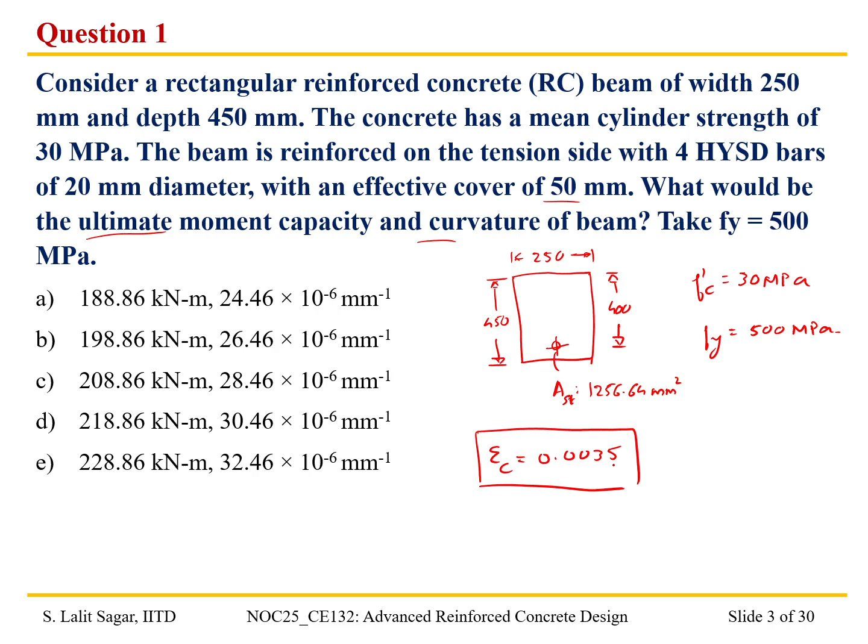I'm going to be solving this using two methods. First we are going to solve it using the regular equations, then we're going to confirm that with the Excel sheet also. We already have the cross section over here.

So we're going to take epsilon c equal to 0.0035. Then we need to assume a value of x, the depth of the neutral axis, so that the compressive force in concrete is equal to the tensile force in the reinforcing steel. But before that, in order to evaluate the compressive force we need the parameters of the stress block, and that is alpha 1 and beta 1. So how do we find out the value of alpha 1 and beta 1? First, we're going to find out the value of beta 1.

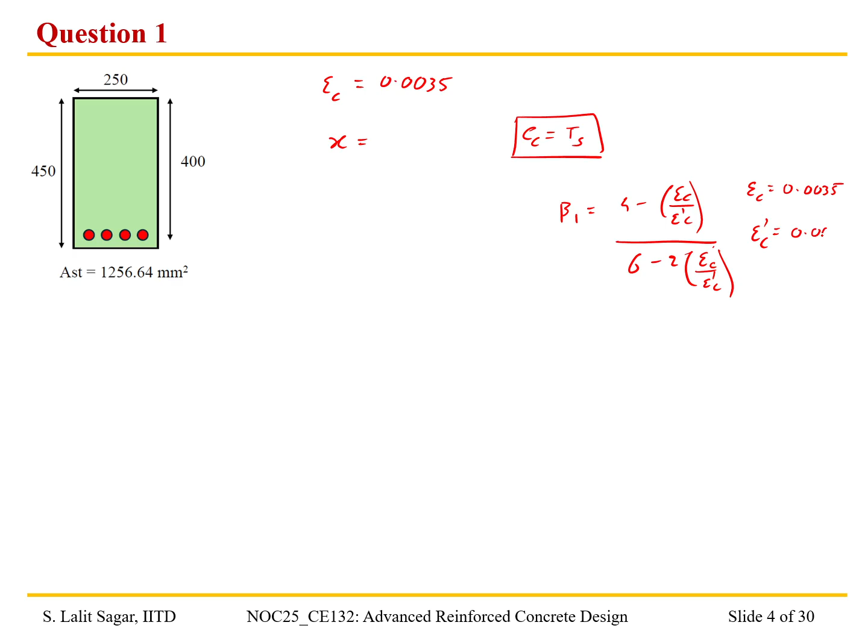Beta 1 is given by 4 minus epsilon c by epsilon prime c, divided by 6 minus 2 times epsilon c by epsilon prime c. We know that epsilon c for the current case is 0.0035. And what would be epsilon prime c? 0.002, yeah exactly, it is 0.002.

So when you solve this, we get the value of beta 1 as... 0.9? Yeah exactly, so we get the value of beta 1 as 0.9.

Let's proceed to find out the value of alpha 1. Alpha 1 is 1 over beta 1, into epsilon c by epsilon prime c minus 1/3 of epsilon c by epsilon prime c whole square. So we get the value of alpha 1 as 0.81, exactly, 0.8102.

We are solving this using the formula explicitly so that we can recap the concepts, but for higher values of strain, in order to develop the moment curvature plot, we're going to be using the Excel sheet, which I'm going to show you in a little while. So from this, let us calculate the value of the effective compressive force.

Before that, we need to assume the value of x, or the depth of the neutral axis. For this particular problem, I got that we need to consider the value of x is equal to 114.9 millimeter. So for that we have Cc equal to alpha 1, f prime c, into beta 1, into x, into b. That will give us the value of Cc.

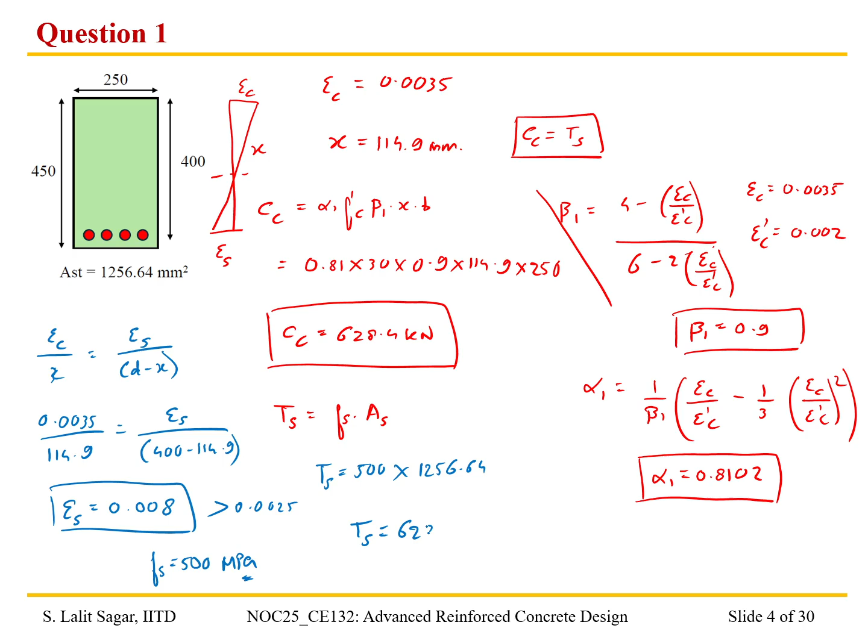1256.64, which gives us a value that has to be equal to Cc, 628.4 approximately. The value can be slightly higher or lower by 0.1 or 0.2. Once we got the equilibrium of the forces in the cross section, we'll find out the value of M.

There are various ways for finding out this value. I will utilize taking moment about the tensile reinforcement, that is Cc into d minus beta 1 into x by 2. So from that, what is the value of M that we get?

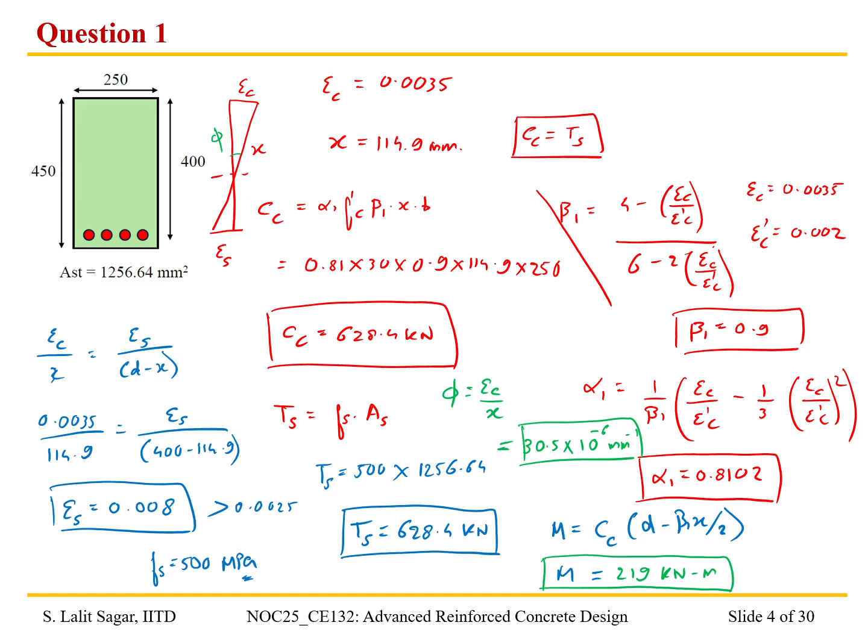So when we go back to the options, we see that option D is the correct response.

Okay, so we'll try to solve this using the Excel sheet also. I hope that my Excel sheet is visible.

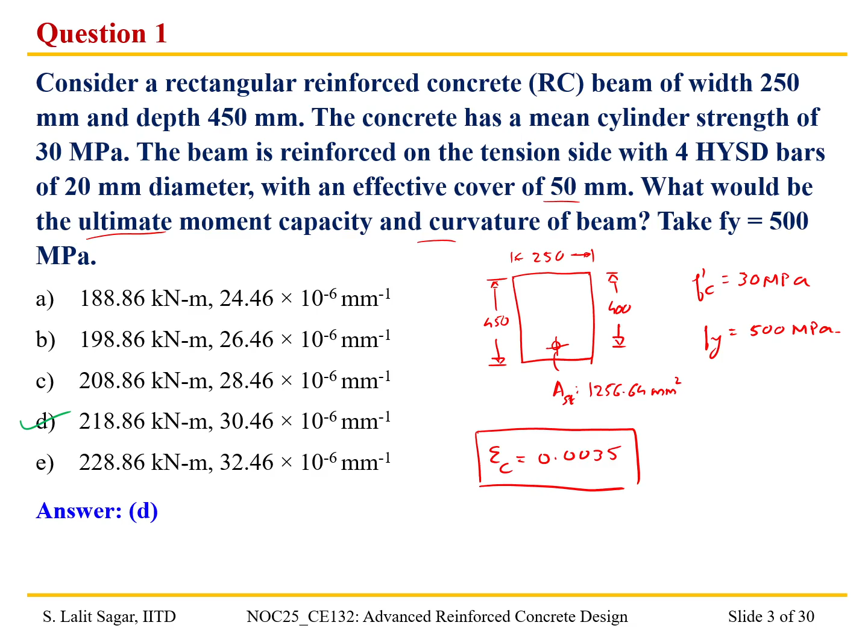I think the first problem is clear. Then we can proceed to the next problem.

So the second problem is for the beam given in question one: the existing reinforcement is replaced with 5 HYSD bars of 25 millimeter diameter. If the beam is tested under 4-point bending up to failure, which type of failure is expected?

So I request you to think for a minute and let me know how we can solve this problem. Okay, so we can solve it together.

So are you able to come up with a way of determining the solution? Kindly let me know. I'm going to draw the cross section in the meantime.

I think we have to assume X, after which we have to find the strain in reinforcement. If reinforcement strain is less than 0.0025, then we can find out if it is compression control, balanced, or tension control.

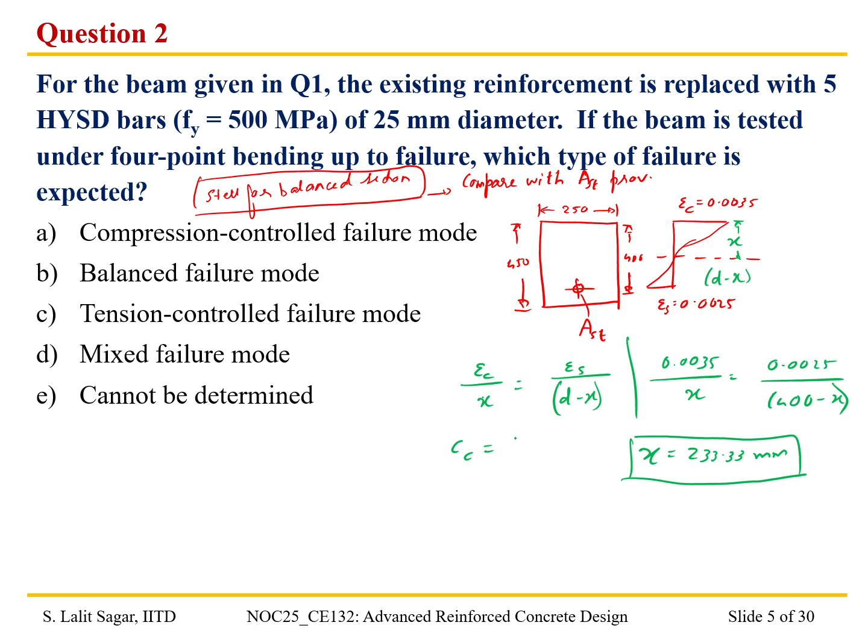And we already need to find out the area of steel. How are we going to solve that? By equating the compressive force and the tensile force, right?

And we know CC is alpha 1 F prime C beta 1 into X into B, and this is Fs into AST.

Alpha 1 and beta 1 we know from the previous problem. So we know that F prime C is equal to 30 MPa, and epsilon C is 0.0035. We know the value of alpha 1 and beta 1. So alpha 1 is 0.81 and beta 1 is 0.9.

So when we substitute all these values, we have 0.81 into 30 into 0.9 into 233.3 into 250 is equal to 500 into AST.

So solving, can you please tell me what is the AST that we are getting? 2551. Okay, thank you for the response. So AST is 2551 mm square.

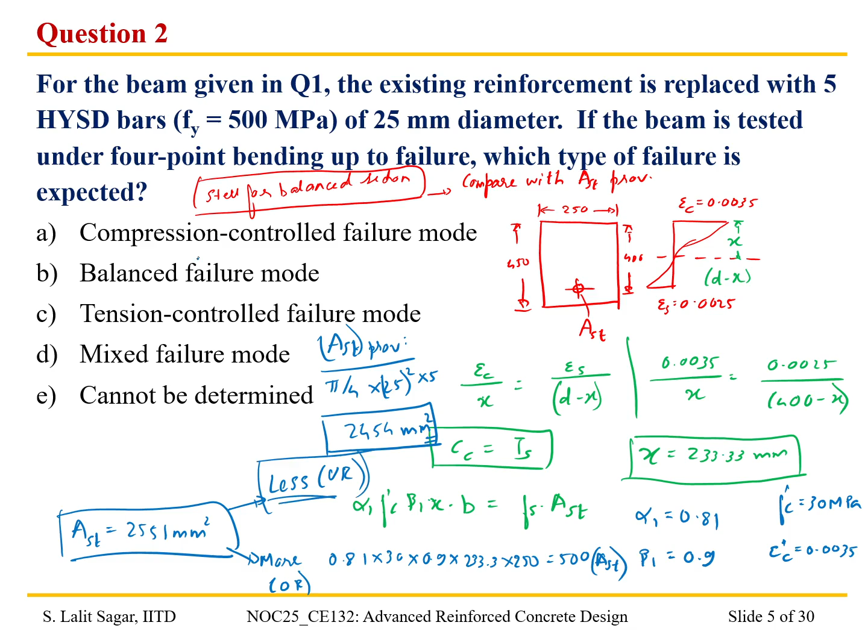So this is slightly lesser than the AST corresponding to the balanced section. So it is under reinforced and it will undergo a tension controlled failure mode. So option C is the correct response.

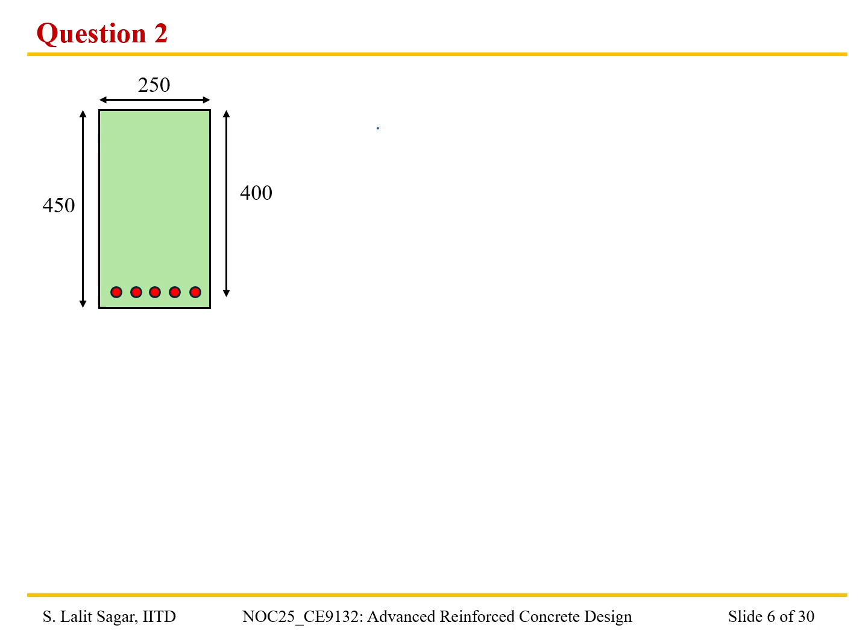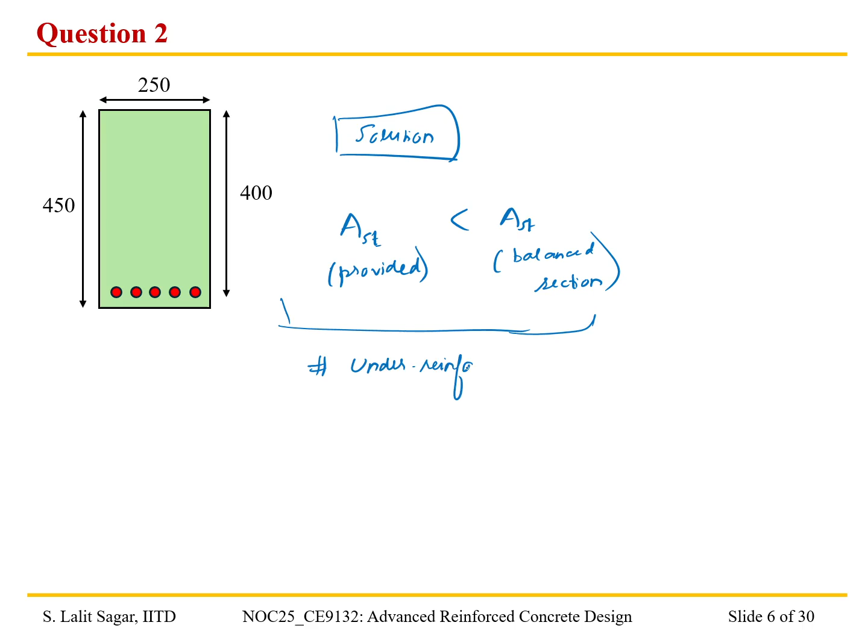So I'm going to write it down correctly over here. So the solution is: AST provided is less than the AST corresponding to the balanced section, so it is under reinforced, tension controlled, ductile failure.

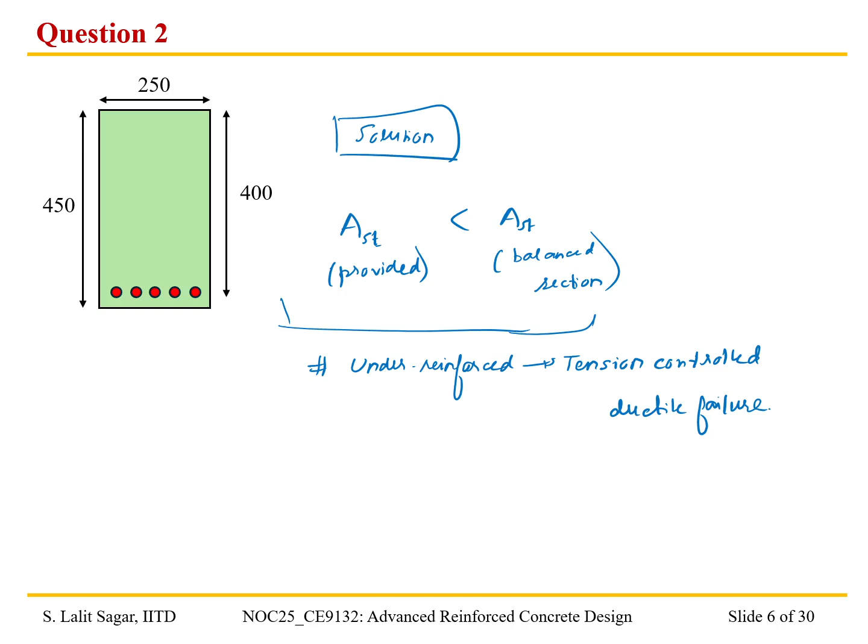Okay, so I think with that we can proceed to the next question now. So it is a straightforward conceptual question. When a beam is subjected to flexure along with axial compression, which of these equations represents the force balance equation for the cross section? Kindly let me know what would be the answer.

This is A, sir. Option A. Yes, sir. Okay, thank you for the response. Let us see what is the answer. Yeah, so exactly, option A is the correct response.

As you might have seen in the class, when we consider a beam that is subjected to uniformly distributed load and a lateral concentrated load, along with the compressive force, when you take a cross section over here and consider the force balance equation, we see that the tensile force in the rebar and the axial force on the beam act in the same direction. And in the other direction, we have the resultant compressive force from the concrete.

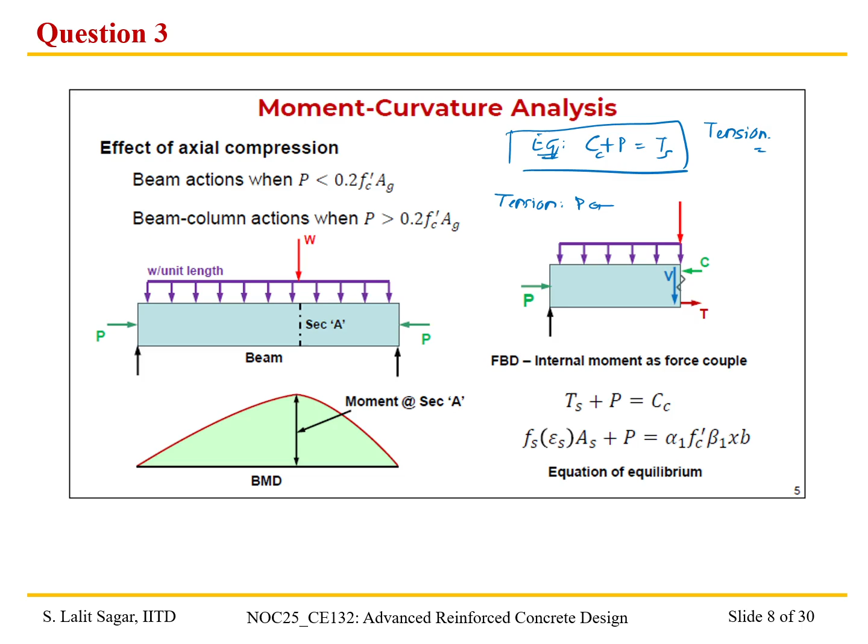So we can proceed to the next question now. This is a numerical problem that we are having. I'm going to read out the data, then we can start solving the problem. So consider a beam. Let me take the pointer.

Consider the beam of dimensions 250 by 450 millimeter overall depth. The concrete has a mean cylinder strength of 30 MPa. The beam is reinforced with 4 bars of 20 millimeter diameter on the tension side with an effective cover of 50 millimeter. If the beam is subjected to axial compressive force of 0.1 into F prime C into AG, that is 10% of the axial capacity, what is the moment of resistance and curvature of the cross section corresponding to a concrete strain of 0.0005?

Okay, so before starting the problem, I would like to ask the participants whether you have prepared an Excel sheet for this.

No, sir, I don't have Excel sheets.

So actually, Excel sheet, as I demonstrated in the class earlier, makes it very easy for you to do the iterative calculation to take the value of x and solve. So I encourage you to make your own Excel sheet, but if not, I'll be happy to share that. I can give the value of x and you can try to attempt the problem. So as mentioned earlier, the first problem we'll do using hand calculation, and later for higher values of concrete strain, we can solve using the Excel sheet.

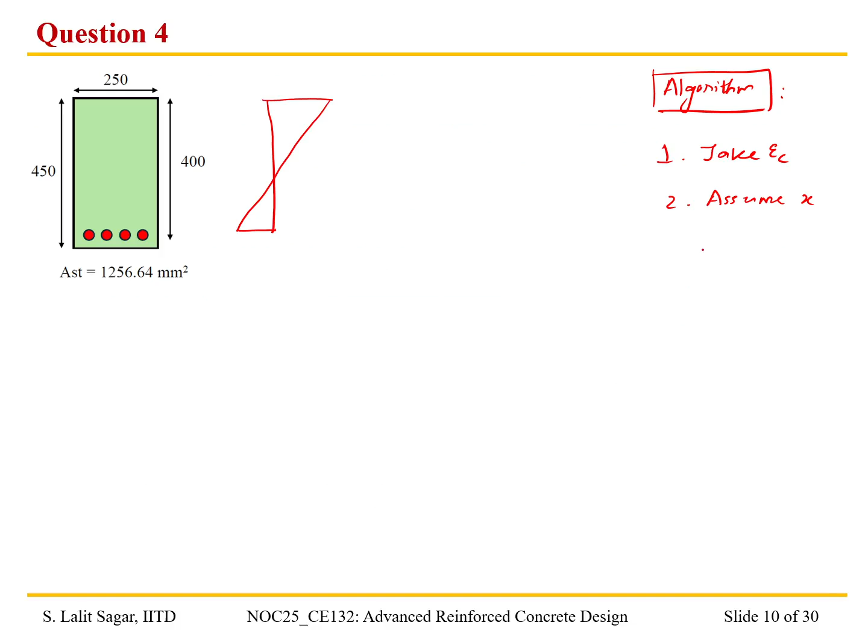Take a certain value of epsilon c, then assume the value of x and make sure that, whenever there is a reinforced concrete beam under compression, it needs to satisfy this equilibrium equation, that is Ts plus P is equal to Cc. So once we get the value of x, then we can go ahead and calculate the value of M and the curvature.

I'm going to solve it very quickly. We have epsilon c is equal to 0.0005, and epsilon s is d minus x. We know that d is equal to 400 millimeter, F prime c is 30 MPa, and Fy is 500 MPa.

Let us calculate the value of the axial force. Axial force is given as 0.1 F prime c into AG, so that would be 0.1 into 30 into gross area of 250 by 450. What would be the value of P? 337.5 - yeah, thanks for the response. So P would be 337.5 kilonewton.

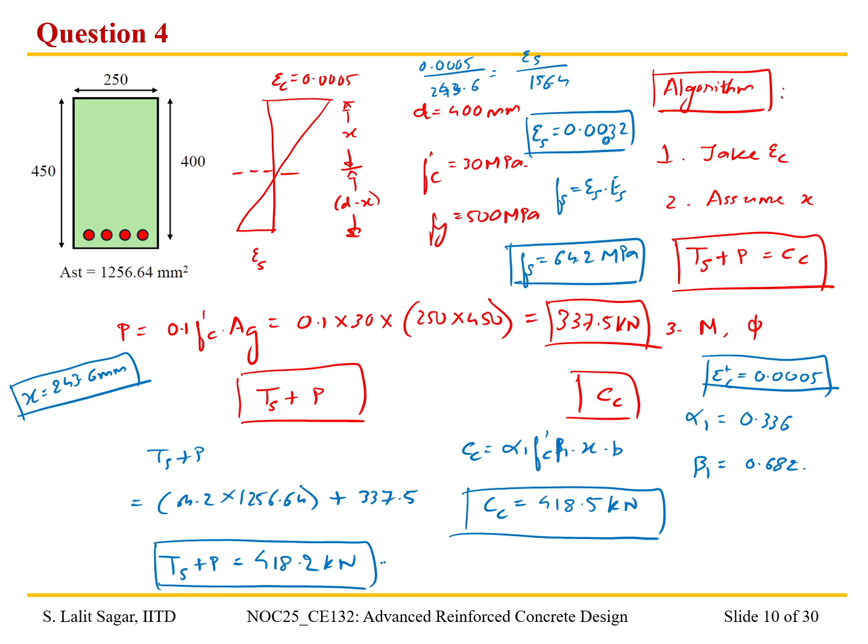I'm going to take a different ink for better contrast. We are going to take the moment capacity about the mid height of the cross section, capital D by 2, because we know that the axial compression acts through the centroid, that is P. So we are going to consider the mid height of the cross section in order to evaluate the moment capacity.

M is given by Ts into d minus capital D by 2, plus Cc into capital D by 2 minus beta 1 into x by 2. Can you please tell me what is the value of the moment that we are getting?

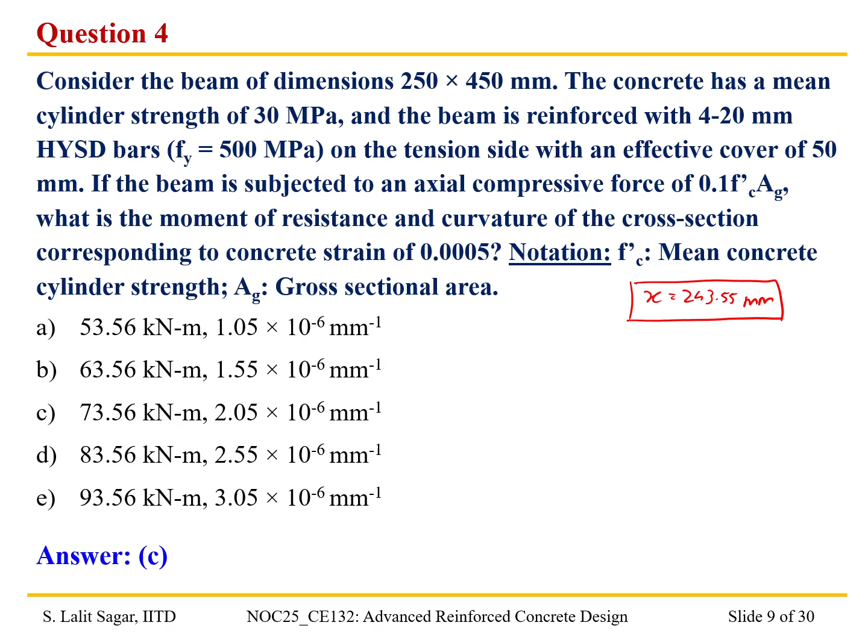I'm also calculating along with you. So I'm getting a value of 73.4. Yeah, 73.4. So please verify this value later on. So M is 73.4, and the value of phi is epsilon c by x, that is 2.05 into 10 to the power minus 6.

Okay, now let us go back to the options and see. So option C matches quite well with the values that we are getting. Okay, so I hope the procedure is clear for the participant. Yes, okay, thank you.

So once we have got this, let us see what the next problem is. So for the beam given in question 4, what is the moment of resistance and the curvature of the cross section corresponding to the concrete strain of 0.001?

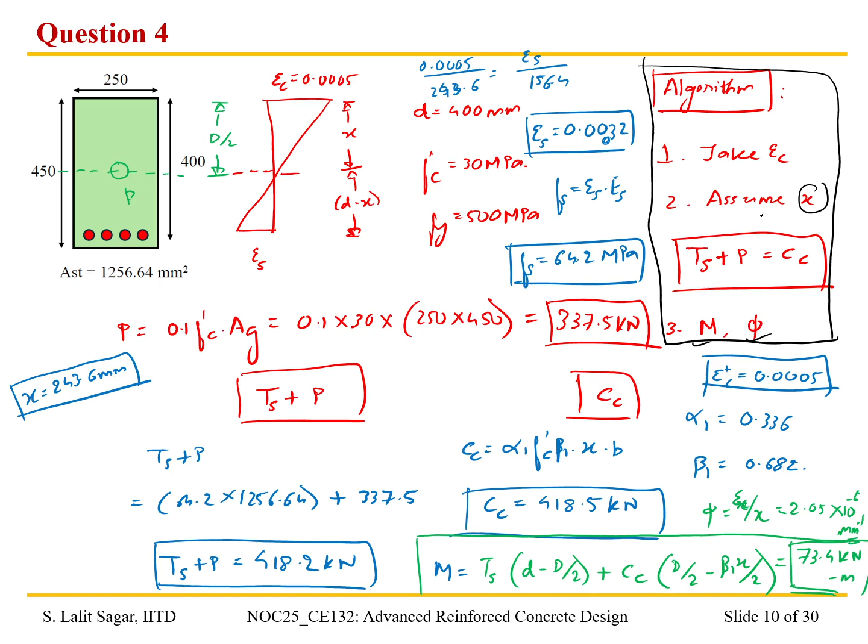So this is the algorithm that we follow. We consider a particular value of epsilon c, assume the value of x, then carry out this iteration until we are able to achieve the force equilibrium in the cross section. Then, based on the equation, we take the moment about the mid height of the cross section. So the moment of resistance is given by Ts into d minus capital D by 2 plus Cc into capital D by 2 minus beta 1 into x by 2. From that we get the moment of resistance. Then we get the curvature of the cross section: phi is equal to epsilon c by x. And then we carry out this procedure corresponding to different values of epsilon c.

So in the previous problem, we calculated M and phi for epsilon c of 0.0005. Now we'll calculate for 0.001. Okay, so now we know the concept, we're going to take the help of the Excel sheet directly. But I suggest you do it manually also, at least for one problem, and try to validate your Excel sheet based on the values you get from the actual formula.

So let us go to the Excel sheet now. The width of the beam is same. Overall depth is 450 millimeter. Effective depth is 400. AST is 1256.64 mm square. Percentage steel is automatically obtained. F prime C, cylinder strength 30 MPa. Epsilon prime C is 0.002 corresponding to F prime C. Fy is 500 MPa. And we have axial compression as 0.1, and the strain in concrete is 0.001.

So option B is the correct answer. I hope the participant was able to understand the calculation that we did using the Excel sheet. Yes, sir, yes, sir.

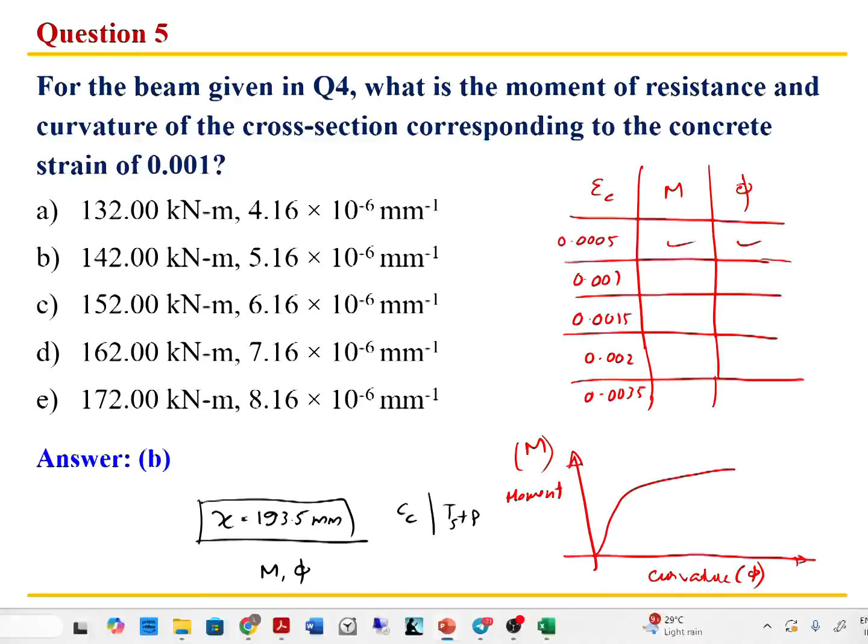I suggest you also participate in the next problem, so we can locate the neutral axis together, and then proceed to find out the moment capacity and the curvature. I think we can start making the entries in this table, so we'll see what we get later on.

So for 0.001 we got 142, and phi is 5.16. Please note that P is 0.1 F prime C into Ag, that is 10% of the axial capacity. For 0.0005 we get 74 and 2.05.

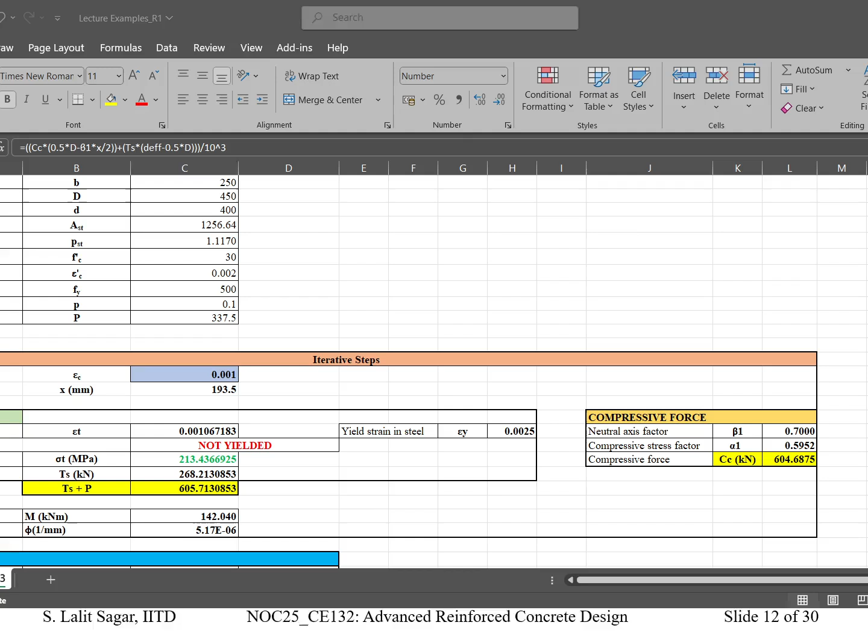74 and 2.05. Now let us proceed to find out the M and phi for 0.0015. It is very straightforward, so I encourage you to prepare the Excel sheet. If not, I can share it along with the PDF of today's PPT.

So now Cc, do we need to increase x or decrease x? Yeah, so we need to decrease. Let us try for 190. Now do we need to increase or decrease? Still decrease. Now we need to slightly decrease, right? Yes, 184.5. 77877. Okay, so we can slightly decrease, let us see what happens.

I think zero point, 0.15. Yeah, I think now it is good enough. So we were able to balance the compressive force and then Ts plus P. Correspondingly, M is 200.36 and 8.13. So it is quite evident that option D is the correct response.

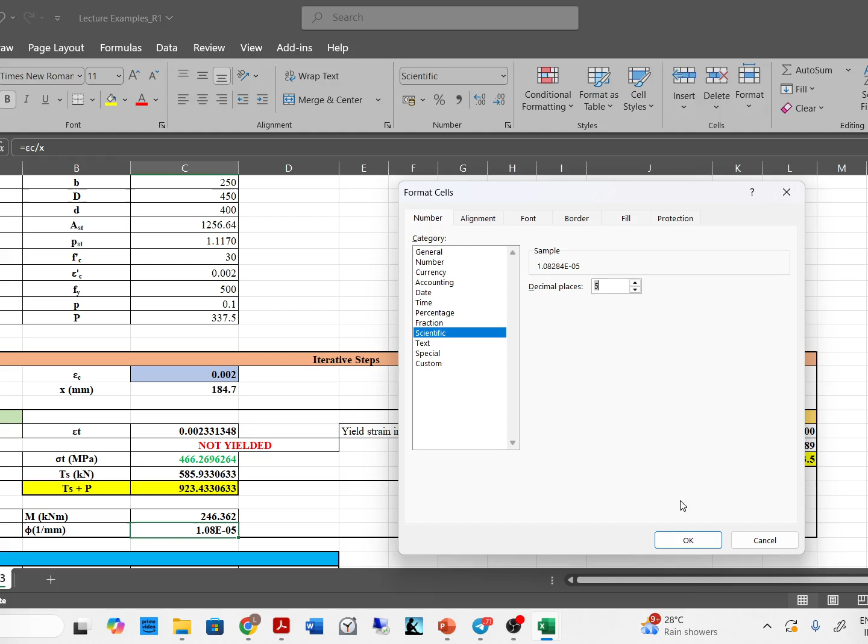246 and 10.82. Yeah, so option A looks like that's the correct answer. Let's go back and make the entry.

Okay, so we need to find out the M and phi corresponding to the maximum compressive strain. Okay, so we got a difference now. So now should we decrease or increase the x value? Decrease, okay, decrease. So let's decrease to 180, decrease even further, 178.

Okay, slightly increase, 176.5. Yeah, I think we can stop at this. Again, we can go ahead and achieve accuracy up to the second decimal point, but I'm going to stop it because once you have your own Excel sheet with you when practicing, I think you can go ahead and go for more accuracy. So let us stop at this point. X is 176.5.

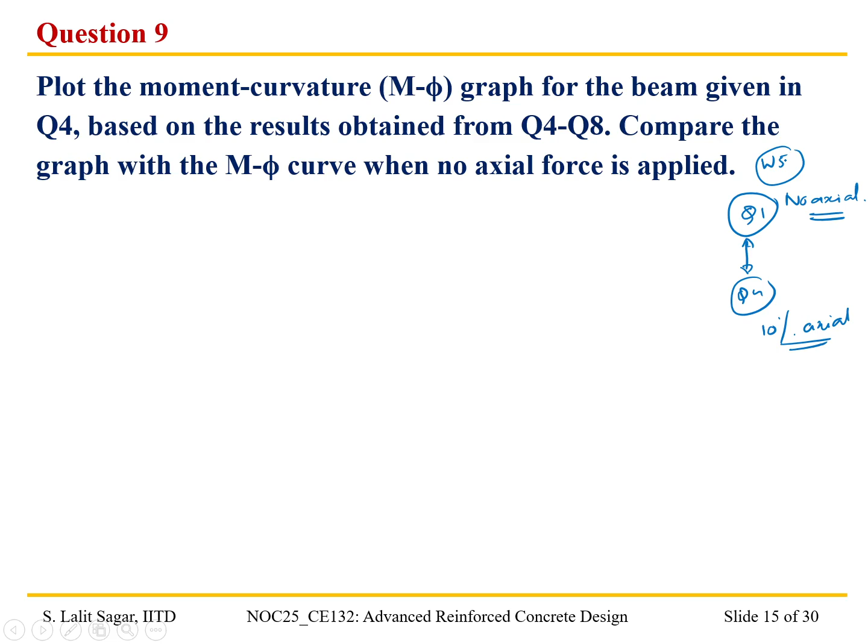We have established this in the previous class also. So when we do the analysis, if the moment capacity is high, we need to increase its capacity by design. But it should not come at the cost of the curvature. The curvature also has to be high in order to ensure a ductile behavior of the reinforced concrete beam. So what we can say is that yes, axial compression is good for the moment capacity, but it should not compromise the curvature of the beam.

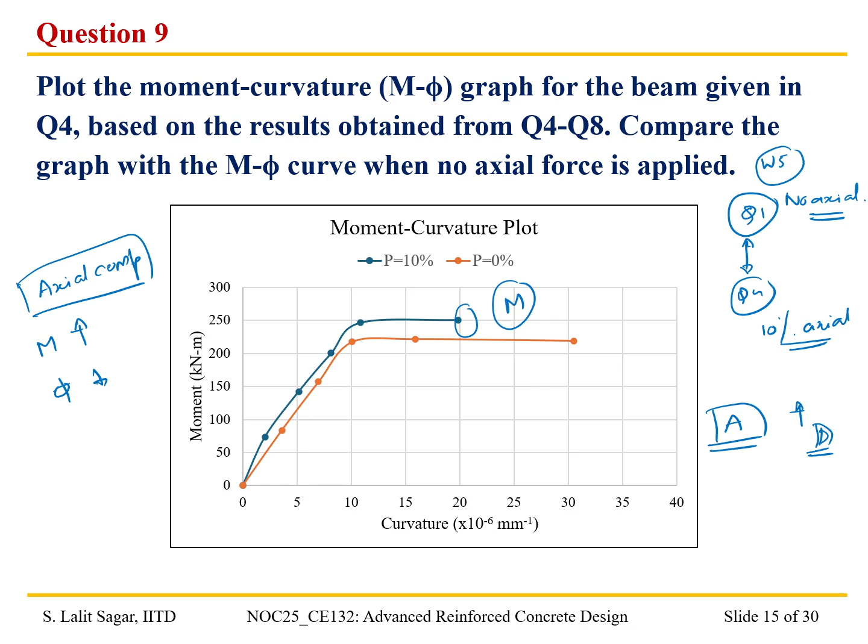So we look at another problem now. Consider the beam given in question 4. If the beam is subjected to an axial compression of 20% of the axial capacity, what is the moment of resistance and the curvature of the cross section? Can you try solving this problem? Just take a few minutes. I will start solving the problem simultaneously.

So now what we have done is we have considered a beam, an RC beam with no axial compression. Then we considered an RC beam with 10% compression. Then we'll do for 20%, 30%, 40 and 50 percent. And what is this 10%? It is nothing but 0.1 times F prime C into Ag.

So for this, we considered different values of compressive strain, epsilon C, that is 0.0005, 0.001, 0.0015, 0.002, and 0.0035. For all these axial compression cases, we are going to find out only the ultimate capacity corresponding to the ultimate strain. I have already done it corresponding to different strain values in order to obtain the plot. But for today's live session, let us go ahead and solve the problem to obtain the moment capacity and the curvature corresponding to different axial compression ratios, corresponding to concrete strain of 0.0035.

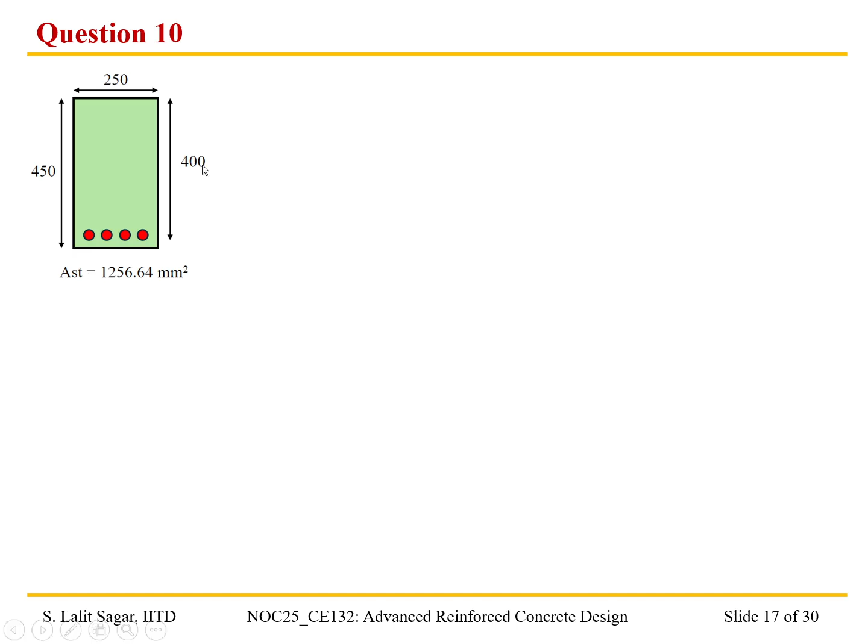So again, I'm going to solve this in the Excel spreadsheet. As I mentioned, the dimensions of the beam remain the same: width of 250 millimeter, overall depth of 450 millimeter, and effective depth of 400 millimeter. The area of steel is 4 rebars of 20 millimeter diameter. Let us go to the Excel sheet now. So B is 250, capital D 450, effective depth 400, As is 1256.64 mm square, pst is automatically calculated, F prime C is 30, epsilon prime C is 0.002, Fy is 500. Now P changes from 0.1 to 0.2, so the corresponding axial force is 675 kilonewton.

Epsilon C is 0.0035. Now, as Cc is less than Ts plus P, we need to increase or decrease? Increase, absolutely right, sir. So 180, 200, let us increase further, 210, increase further, 220, increase a little further, 230, increase further. As you can see, the reinforcing steel has yielded, it has crossed the value of 0.0025, so Ts plus P is not going to increase any further. We need to achieve equilibrium only by increasing the depth of the neutral axis, that is the only way. Let us do for 235.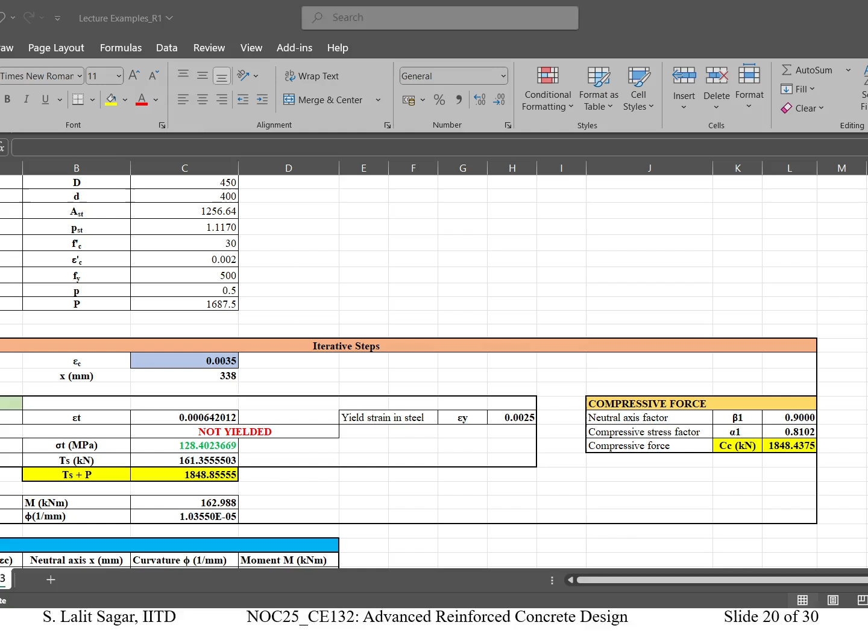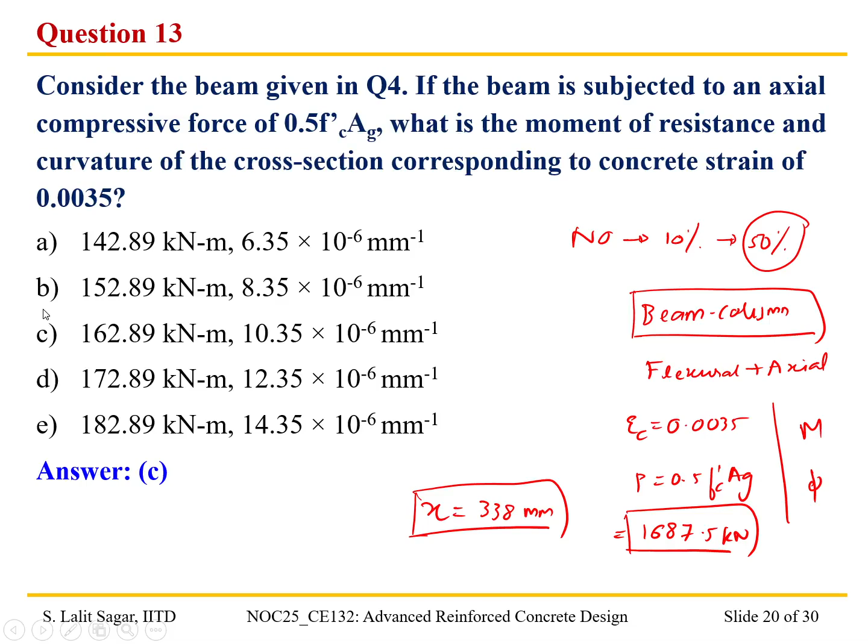X is equal to 338, and the corresponding moment capacity is 163 and 10.4. So option C is the correct answer.

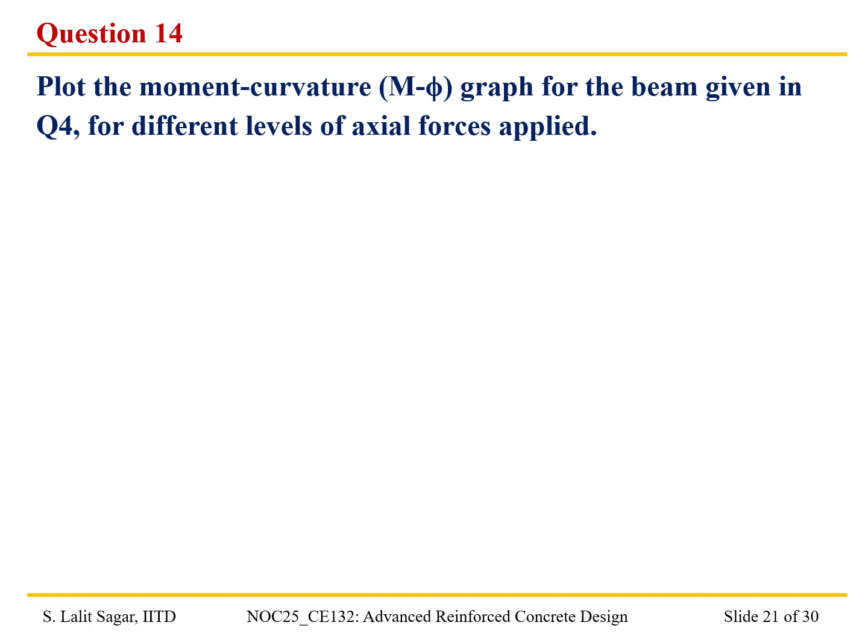Now we have seen that we need to plot the moment curvature plot for the beam given in question 4, corresponding to different levels of axial force applied. So this is the moment curvature plot we are getting. This consists of many data points: this is corresponding to no axial force, P equal to 0, and this is P equal to 10%. In total, in this graph we have almost 25 data points where we've plotted the moment curvature graphs corresponding to different values of axial compression.

What we can see here is that when we increase the axial compression, initially up to about 10%, corresponding to 30%, there is an increase in the moment capacity. But there is a very drastic decrease in the curvature of the beam. The curvature drops from 30 into 10 to the power minus 6, to 20 into 10 to the power minus 6. So there is almost 33% reduction in curvature, which means it is transitioning from a ductile behavior to a not-so-ductile behavior.

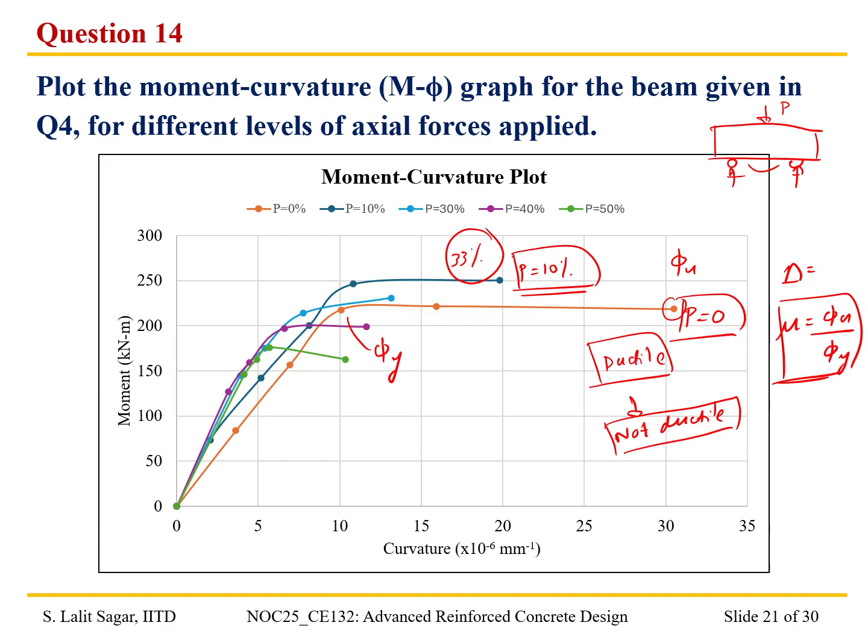Option C, sir: axial force increases the ultimate capacity but decreases the curvature capacity. Thank you for the response, and as you said, option C is absolutely the correct answer. We saw that in the previous plot also: if you increase limited axial force, say up to around 10% to 20%, there is an increase in the ultimate moment capacity, but the curvature decreases. So as you rightly mentioned, option C is correct.

So the next question is: how is the effective reinforcement ratio of a doubly reinforced beam expressed, if rho is the reinforcement ratio on the tension side and rho prime is the reinforcement ratio on the compression side?

Effective reinforcement ratio. Can you attempt the answer?

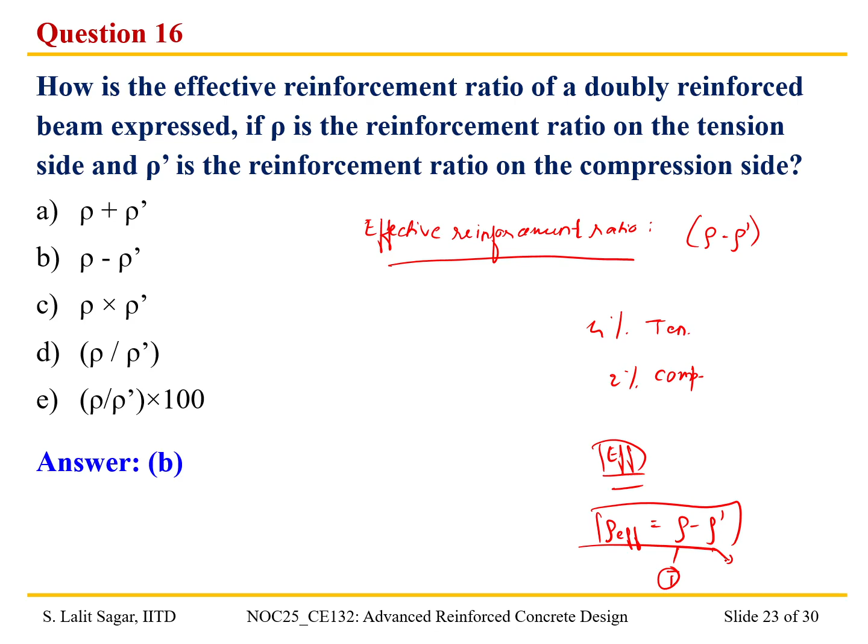Option B is the correct response. Let's say you have provided 4% on the tension side and 2% on the compression side. So the effective reinforcement ratio, rho effective, is rho minus rho prime. Rho corresponds to the tension and rho prime corresponds to the compression reinforcement.

Now, once we have tackled the reinforced concrete beam subjected to axial compression, we are going to start solving problems on the reinforced concrete beam which are doubly reinforced. Kindly take a few seconds to solve the problem. Even I'll be solving it simultaneously so we can obtain the correct answer.

So now we have the doubly reinforced beam. I'm going to draw the cross section now. Okay, I think we already have the cross section, let us take the help of this. The objective of this problem is to determine the moment capacity and the curvature corresponding to a concrete strain of 0.0005.

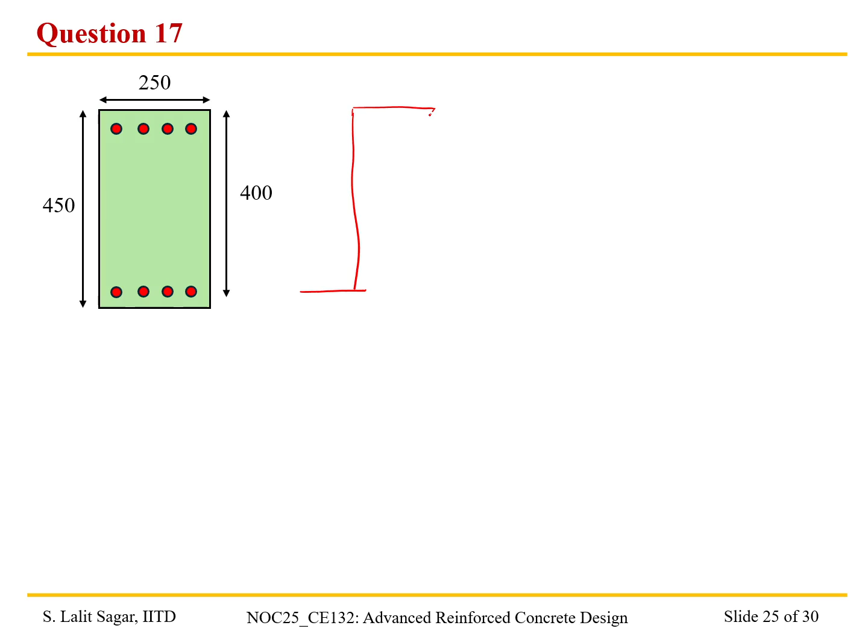Let us quickly start with the hand calculations now. First, I'm going to draw the strain profile. So here, in addition to the concrete and steel rebar, we have the steel in compression as well.

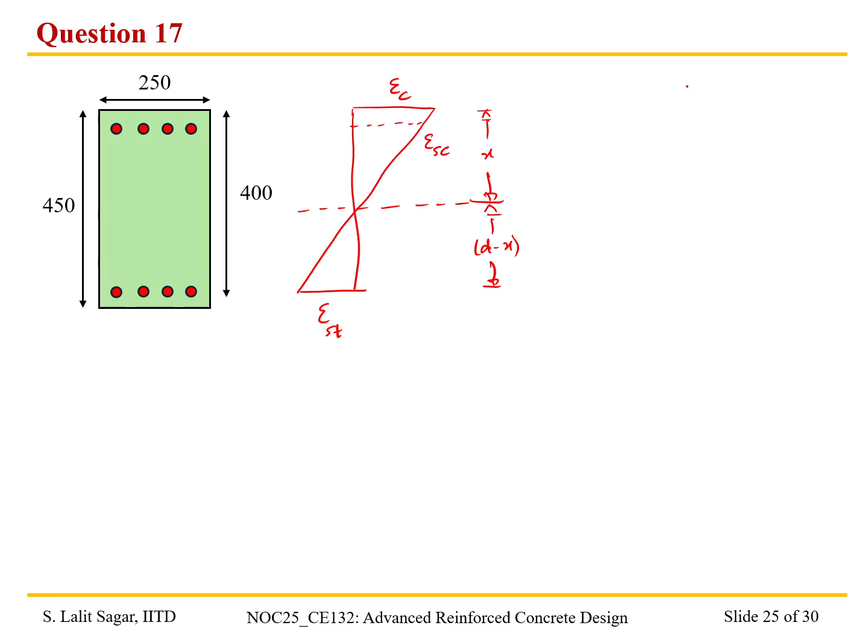I request you also to start solving the problem, we can do it together. Now we need to balance the compressive and the tensile forces, that is Cc plus Cs should be equal to Ts.

I'm going to give a hint that corresponding to x equal to 130.1 mm, we were able to achieve the equilibrium. So we'll just quickly start and try to solve the problem now.

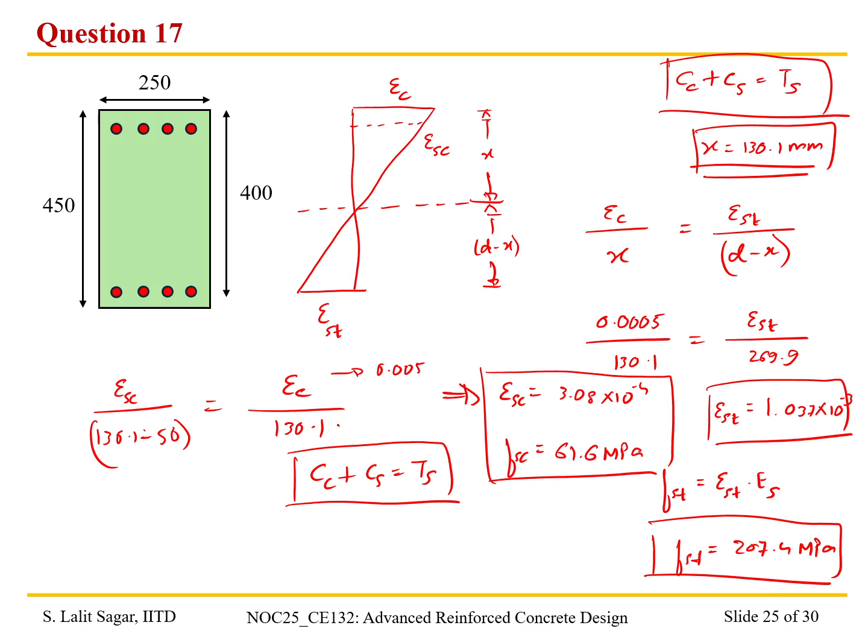Okay, so from this we need to equate and obtain the equilibrium. So corresponding to this, we need to obtain the stress block parameters. Let me take a different ink.

So I'm going to solve here. Cc is alpha 1 F prime C, beta 1 into X into B, plus FSC into AS is equal to Ts. Ts is FST into AS. I'm going to take the help of the Excel sheet to calculate that, or well, since it's the first problem, I think we can also do it manually.

Alpha 1 is 0.34 and beta 1 is 0.68. You'll have to excuse me, I'll take the help of this space only. Into X is 130.1 into 250. Plus FSC is 61.6 into AC is 600. That is equal to FST, which is 207.4 into 1256.64.

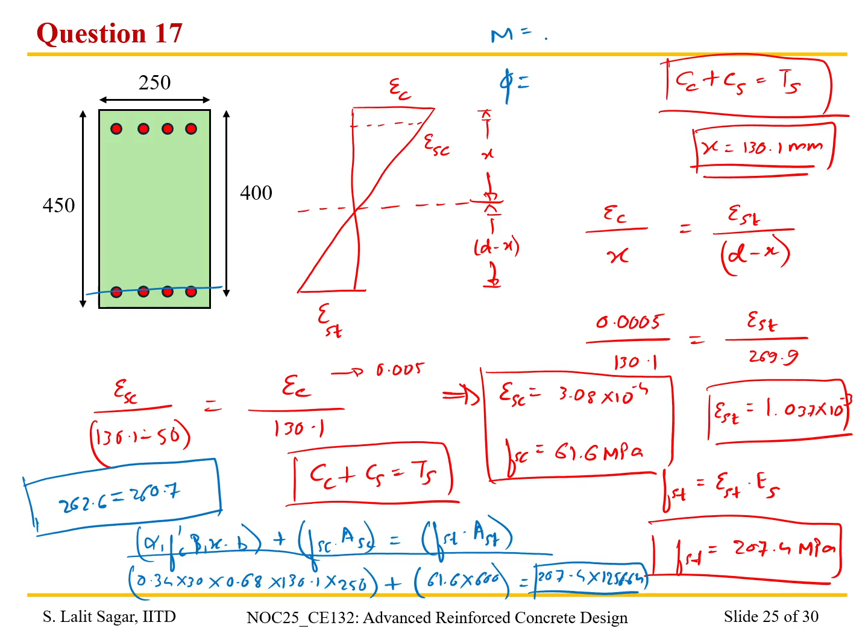So we can go ahead and calculate the moment capacity and the curvature. What I'm going to do is calculate considering the level of the tensile reinforcement. M can be found out using Cc into d minus beta 1 into x by 2, plus Cs into d minus d prime. And phi is, as we know, epsilon c divided by x. So from that, what is the value we are getting?

So after calculation, I got the value of M as 92.5 kilonewton meter and phi as 3.8 into 10 to the power minus 6 per millimeter. I request you to solve, use this equation, plug all the values and see if you're getting this answer. So option A is the correct response.

Now we need to find out, first, let us verify our previous problem. So we are going to take epsilon C as 0.0005, and I'm able to achieve the force equilibrium corresponding to a depth of 130.1 millimeter. Here, as you can see, I'm able to balance the tensile force and the total compressive force consisting of the equivalent compressive force in the concrete and the compression force in the reinforcement. So we're able to achieve the balance. Then the corresponding moment capacity is 92.5, and the curvature is 3.84. So we're able to validate our Excel sheet based on the theoretical formulas that we have calculated.

Now we are going to change epsilon C to 0.0035. In order to achieve equilibrium of the cross section, do we need to increase or decrease the value of neutral axis depth?

So here CC is 970, CC plus CS, and TS is 628. We need to decrease the value. We're going to decrease it further. Okay, 90, 85. Okay, 83, we need to increase it now, 84. We need to reduce it slightly, 83.8, 83.9. I think we can stop here. We can take the value of x as 83.9.

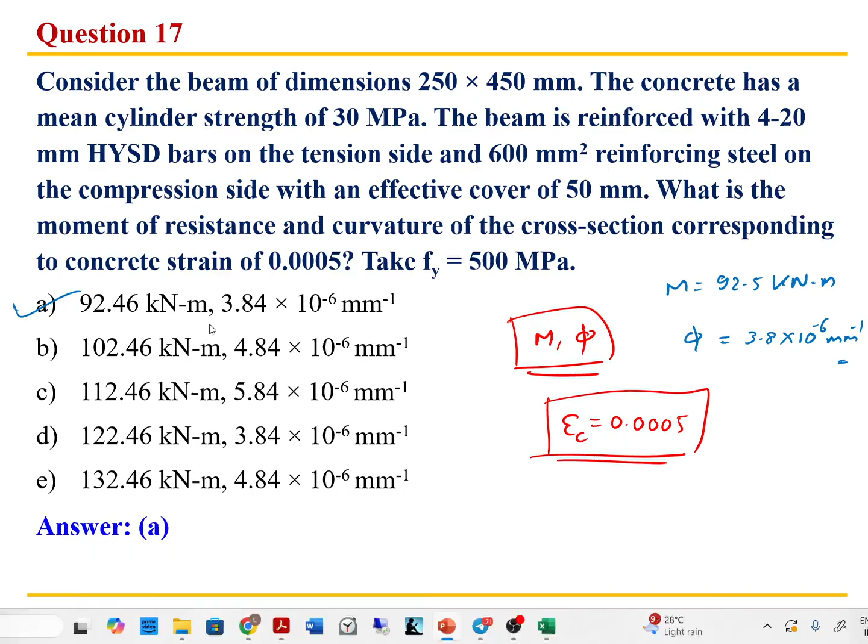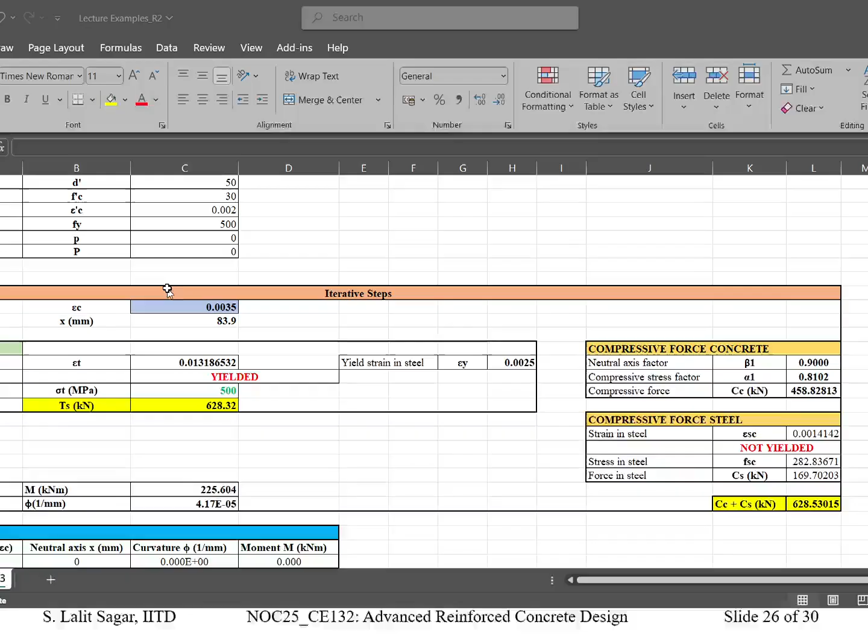And correspondingly, taking the moment about this section, about the tensile reinforcement, we have the value of Ms as 225.6 and 41.7. So option C is the correct response.

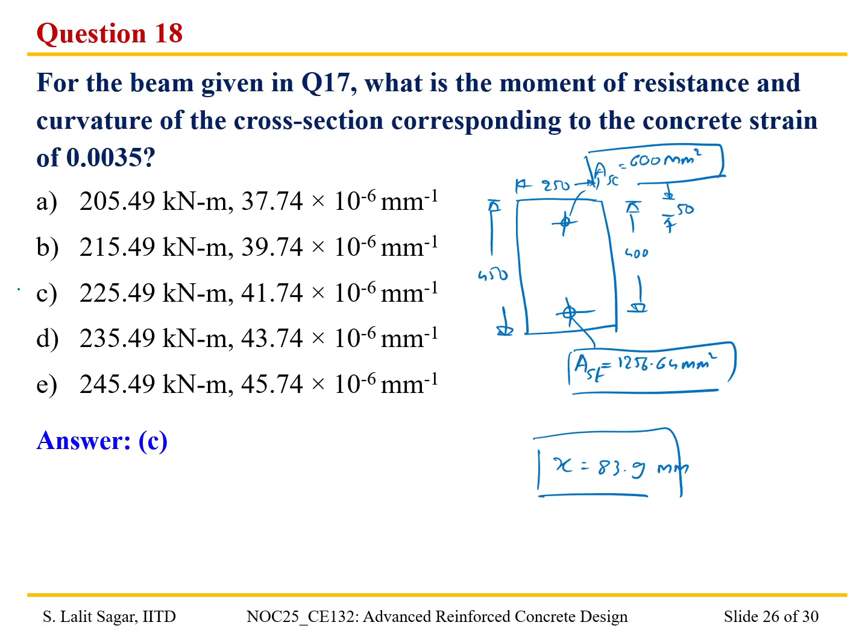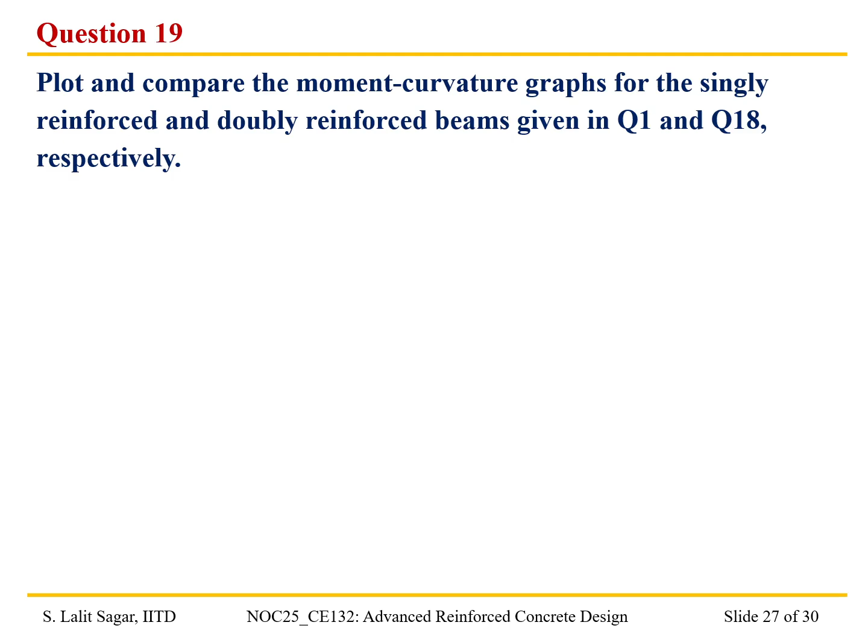So we'll plot and compare the moment curvature graphs for singly reinforced and doubly reinforced beam given in question 1 and question 18. So here for the singly reinforced, and here we have the doubly reinforced.

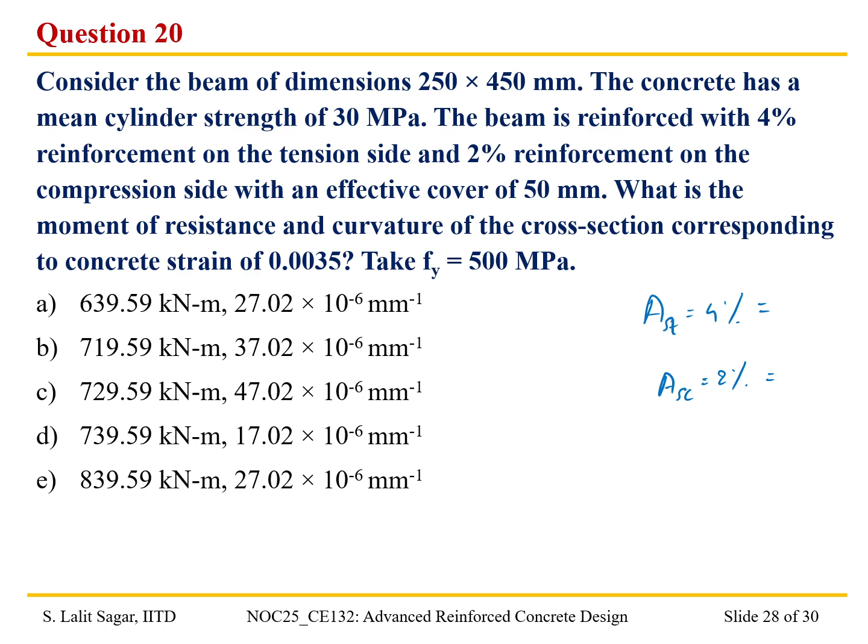Now, to conclude the class, we have a very interesting problem. We will see what will happen when the beam is reinforced with 4% reinforcement on the tension side, and the area of compression reinforcement is 2%. So AST is equal to 4% and ASC is 2%. What would be the corresponding AST and ASC? So 4% is 0.04 into 250 into 450, that gives a value of 4500 mm square, and this is 2250 mm square. Okay, so we need to find out the moment of resistance and the curvature.

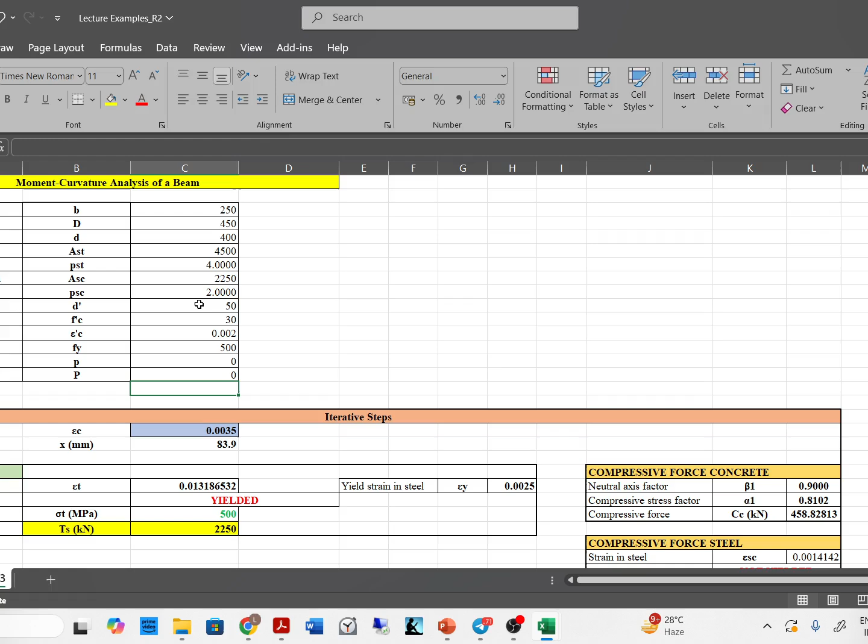Let us go to the Excel sheet. The width and depth are the same. This is 4500, so that is 4% reinforcement. This is 2250, that is 2% reinforcement. Then the remaining properties are the same, and epsilon c is 0.0035. Now in order to achieve the balance, we need to increase the value of x.

Let us try 100. We'll increase it further, 150. Increase it even further, 160. Increase it even more, 170. 175. Okay, increase it even more, 180. 190. 200. Okay, 205. We need to increase it slightly more. Okay, 205.8. I think we can stop here.

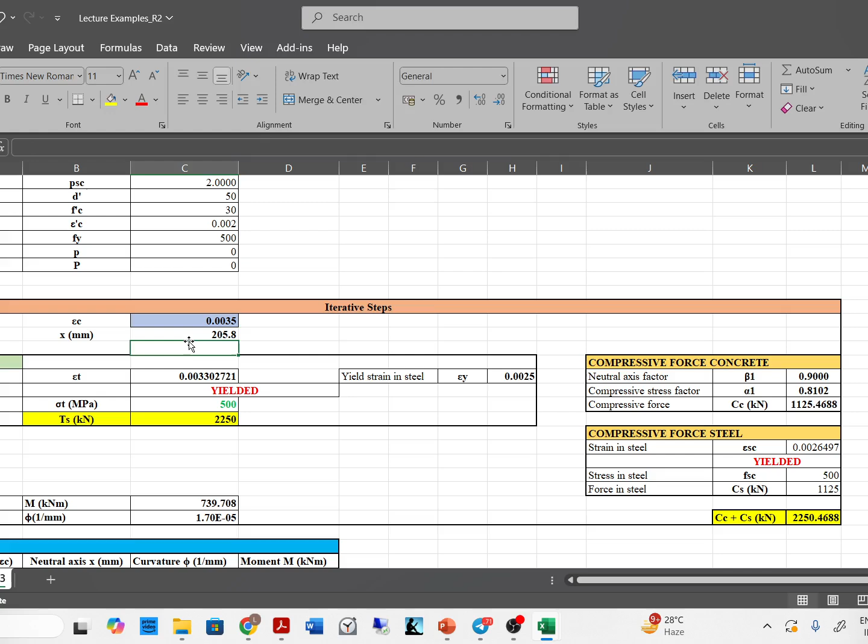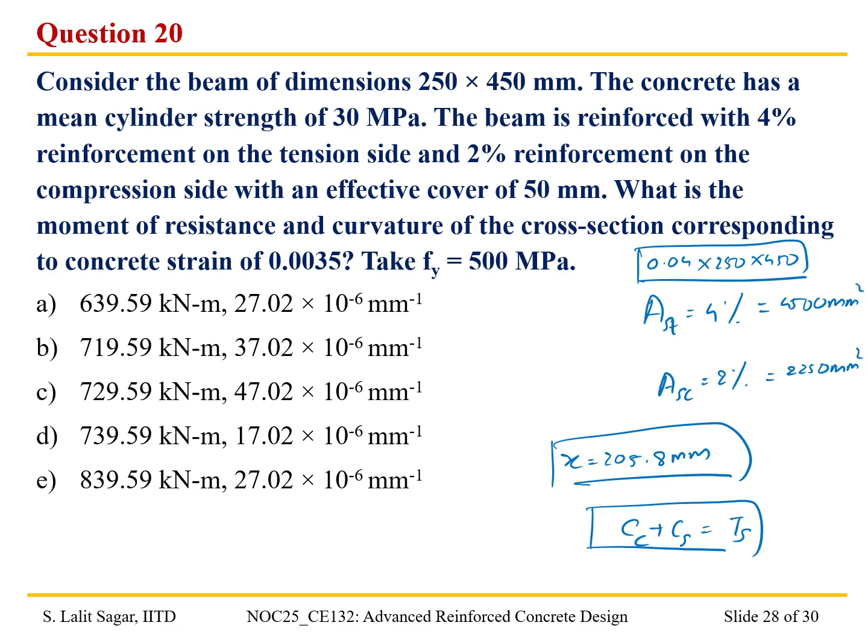And we can see that for x equal to 205.8, we are able to achieve the force equilibrium, that is Cc plus Cs is equal to Ts. Correspondingly, we have the moment capacity as 740 and 17.02. So option D is the correct response.

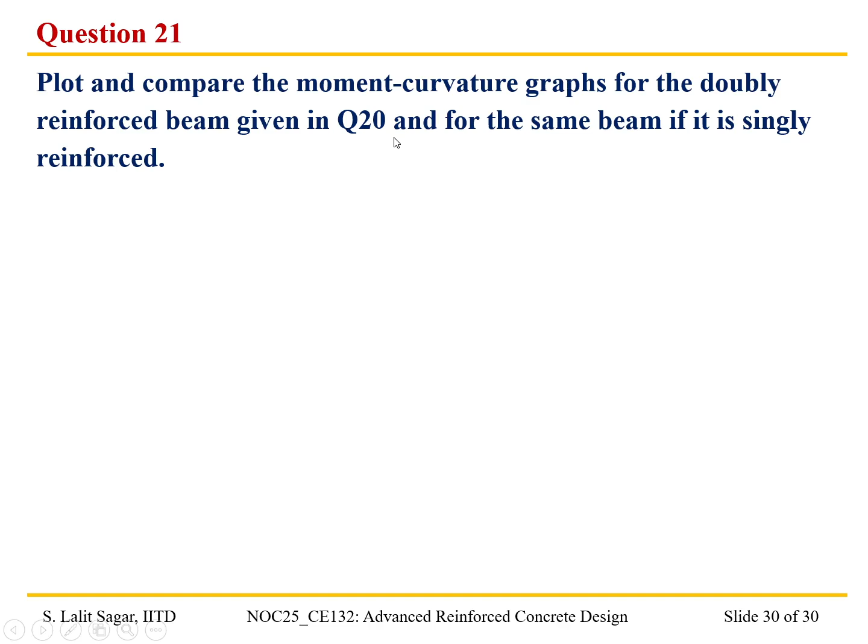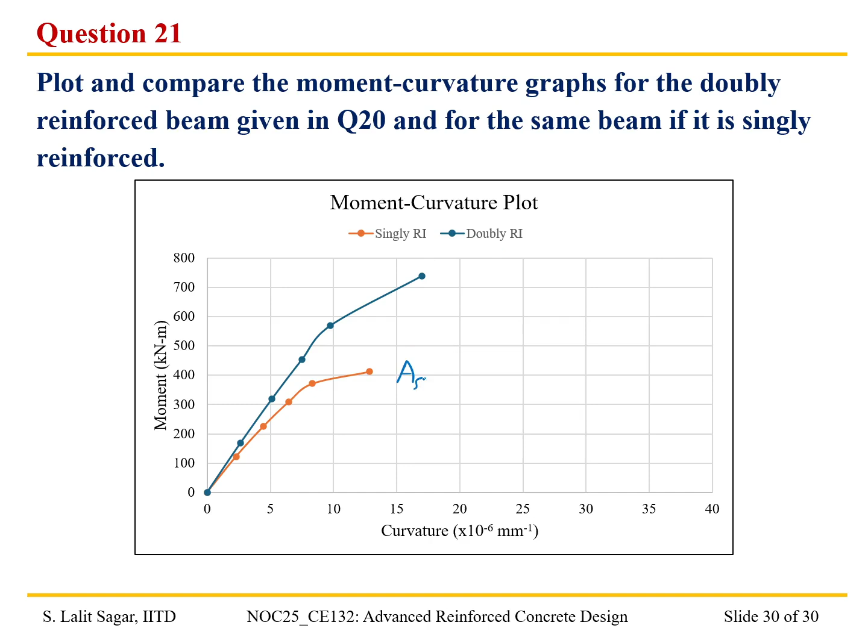Now we'll plot and compare the graph for doubly reinforced and singly reinforced. For the singly reinforced, AST is 4500 mm square. Now for the doubly reinforced section, we have AST as 4500 mm square and ASC as 2250 mm square. So we can see here the benefits of using a doubly reinforced cross section.

So when we use a doubly reinforced cross section, it helps in not only increasing the moment capacity, but also the curvature is significantly increased. So which is why, even in practical reinforced concrete structures, we try to provide a doubly reinforced cross section, because of the enormous benefits that we receive in terms of the moment capacity as well as the curvature.

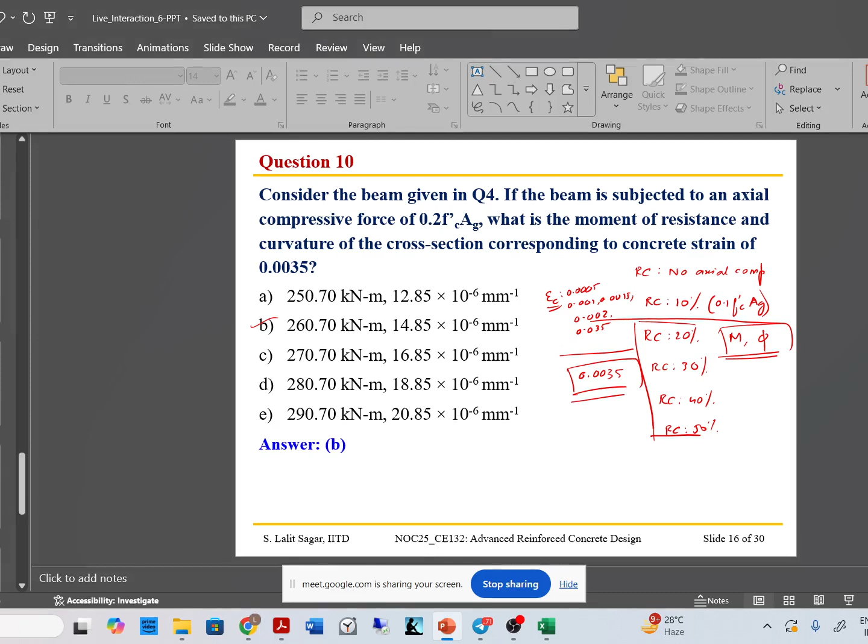You mean to say that it fails in tension? Okay, so I would like to clarify in this way.

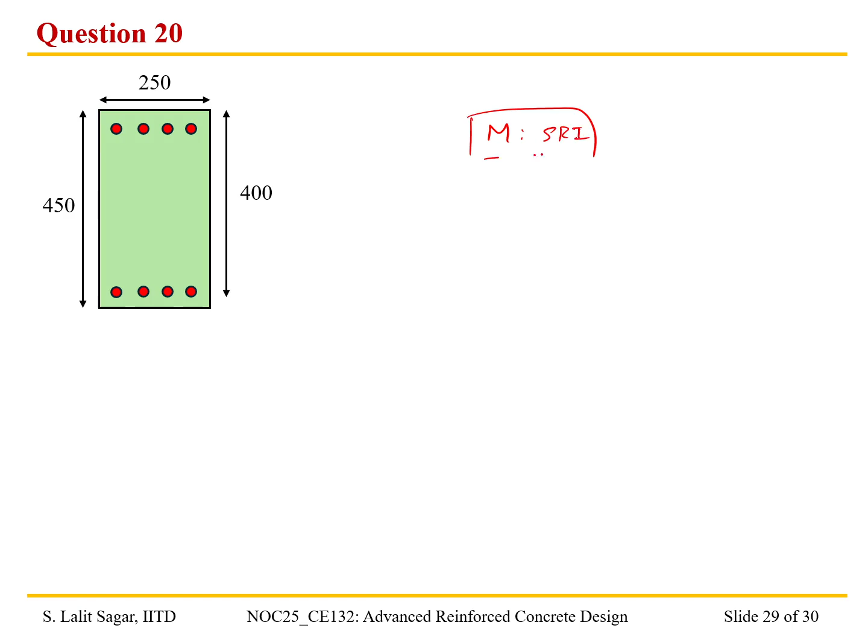So first, what we will do is find out the moment capacity. We design it as a singly reinforced beam. Let's say that the singly reinforced capacity is 600 kilonewton meter.

And you have already provided 4%, which is the maximum permissible reinforcement. But let us say the actual demand is 800 kilonewton meter. So at that point, we are going to provide a doubly reinforced section.

So in the doubly reinforced section, in order to accommodate this extra moment, we are going to provide ASC. Here AST1 corresponds to the singly reinforced cross section, and AST2 will accommodate for this additional moment coming from the ASC.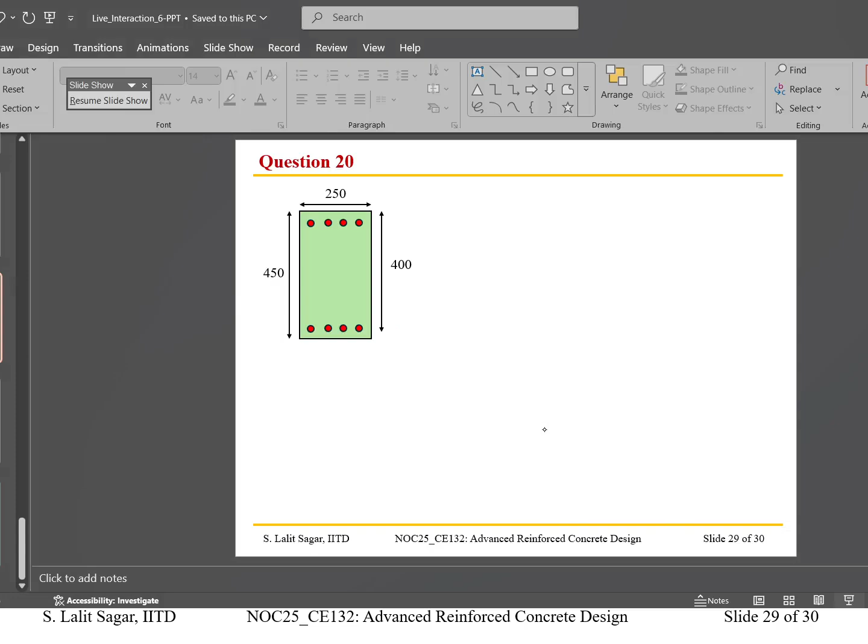So we will always make sure that when providing this, CC plus CS is equal to TS. What I'm trying to say is that we will always make sure that it is failing in tension only. I hope I'm able to make it clear.

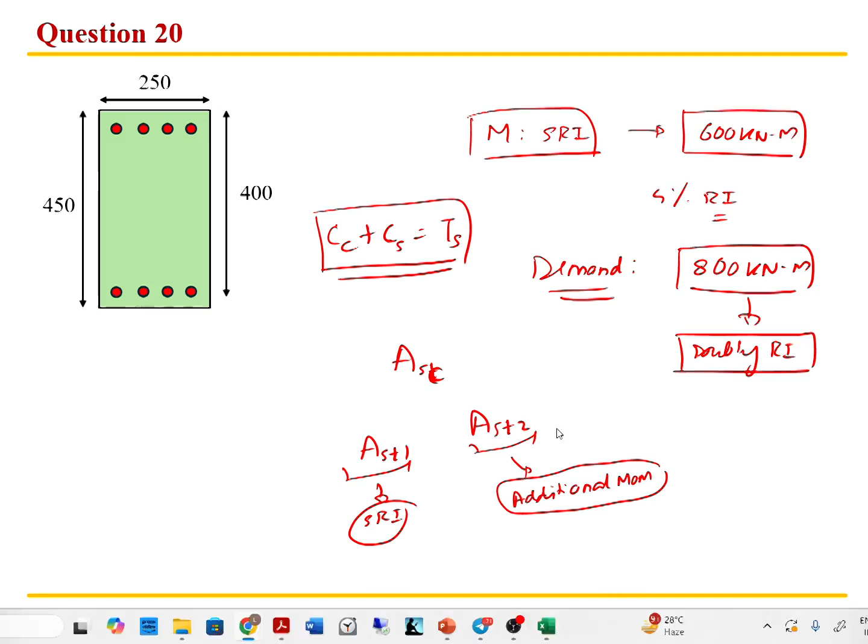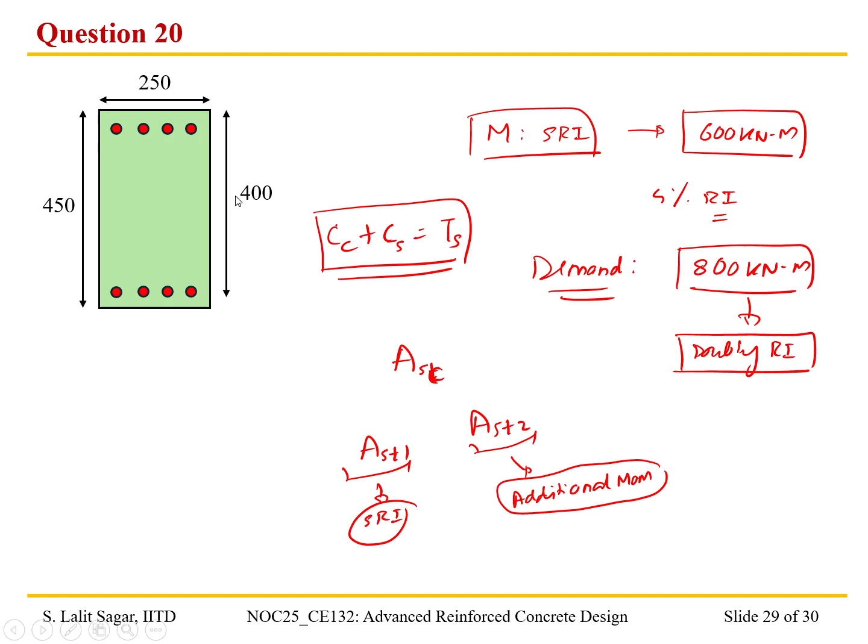But what if compression steel is over-reinforced? Then what failure is the section going into, tension failure or compression failure? If you're asking that you're providing too much compressive steel, so it is strong in compression, right?

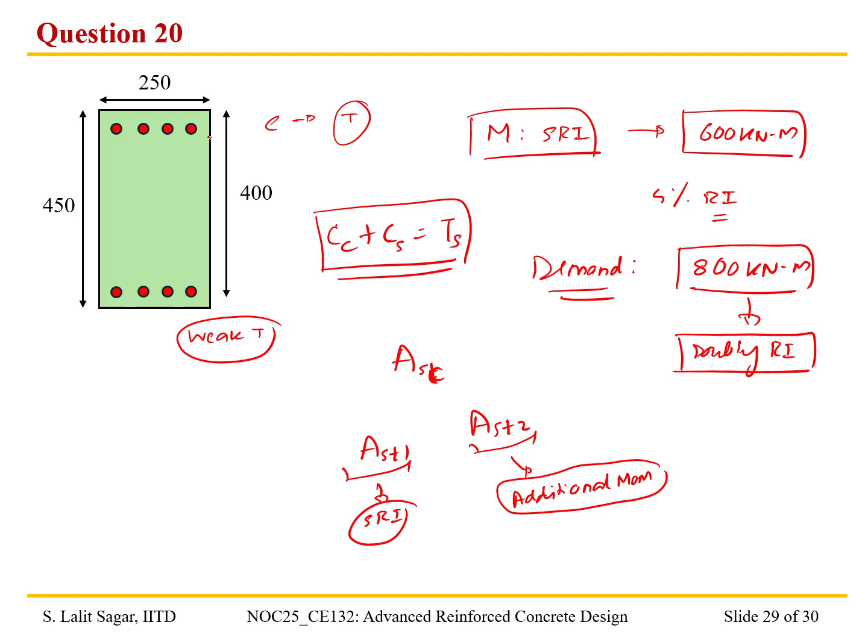Yes, so it'll undergo tension failure because it is still able to resist the compressive forces, but it is still weak in tension. That is why it is going to fail in tension only, so it's a ductile failure.